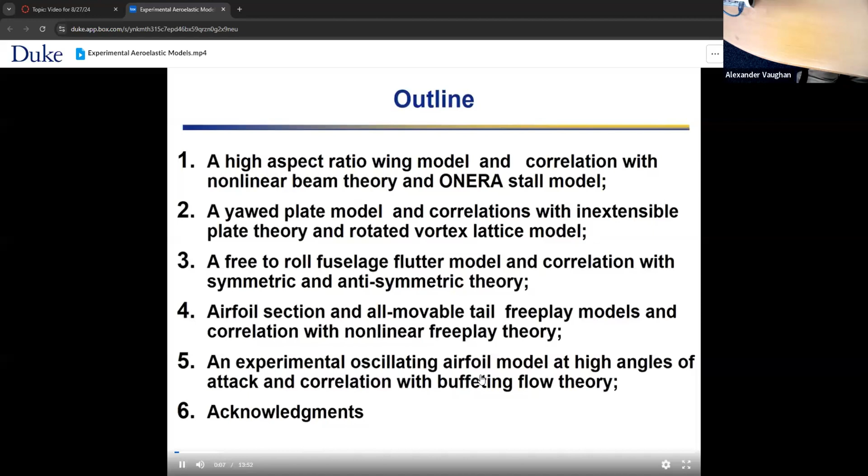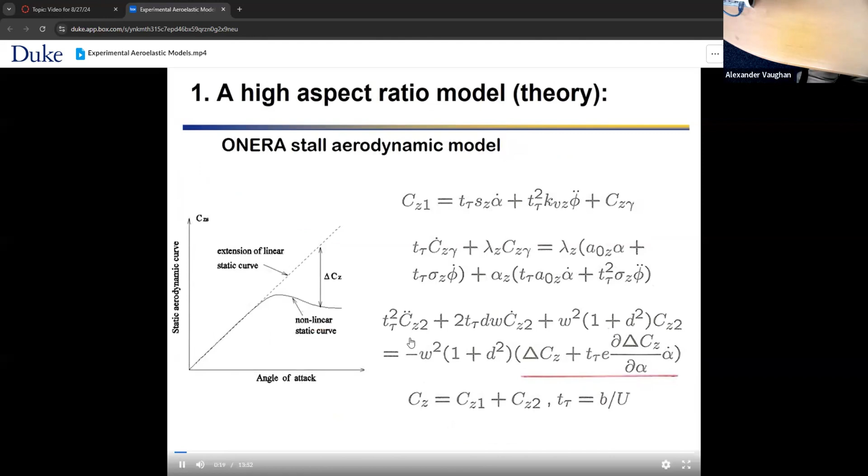But this will give us a shot at what's happening initially. So if I click this, I'll get started. It'll start playing from the beginning. Is that where you want to start? Okay, that's fine. It only runs 13 minutes, so we'll let it run through. And this is just a list of the various wind tunnel experiments for which we have videos. And there's the math models. I'm not going to tell you the details of the math models, but there are some math models that go along with this.

This is not the video yet, but this gives you an idea of what the physical model looks like in a wind tunnel. Over here, this is the model in the wind tunnel that's mounted on the sidewall. It's a very flexible piece of structure, so it's deflecting under gravity. The next time you're at an airport and you look at a Boeing or Airbus airplane on the runway before they start flying, they're deflecting under gravity. They're very flexible. Even modern commercial aircraft are much more flexible than they once were, and deliberately so.

So when you fly, the aerodynamic forces lift the wing, counteracting gravity. The lift has to equal the weight of the airplane, otherwise you don't get off the ground. But you'll see in the video that wing lifting as we start the wind tunnel and the airspeed increases. And what you'll see is that when the wing becomes approximately horizontal, when the steady flow lift is balancing the weight of the wing, that's near where it begins to become dynamically unstable. And we call that flutter. And that's the bread and butter of aeroelasticity, right?

Because most airplanes are designed to be not very far away from the flutter condition. You usually don't want to be in the flutter condition. Sometimes you find yourself in that condition unexpectedly, particularly in a flight test. Although it has happened in operations, there are cases where the airplane was initially free of flutter, but they made a modification and they either didn't do the analysis or the wind tunnel testing appropriately, and the chief engineer decided not to do a flight test because it was going to be very expensive and delay the program. And then when they flew the plane, they discovered that was probably not a good cost-saving measure.

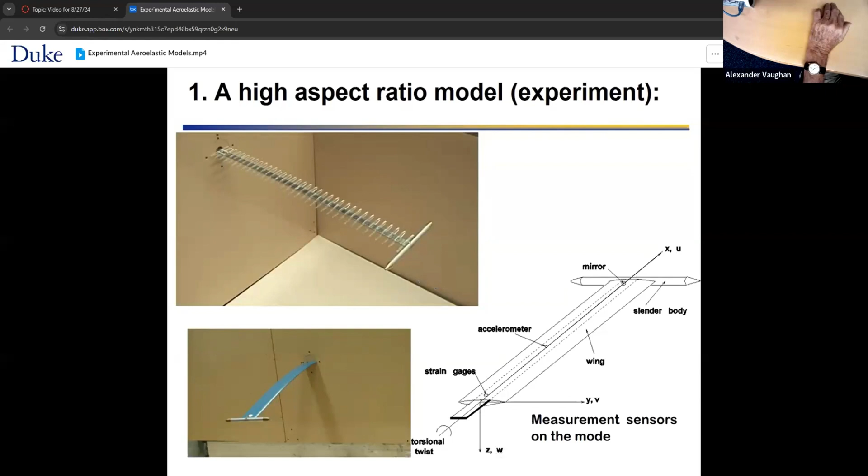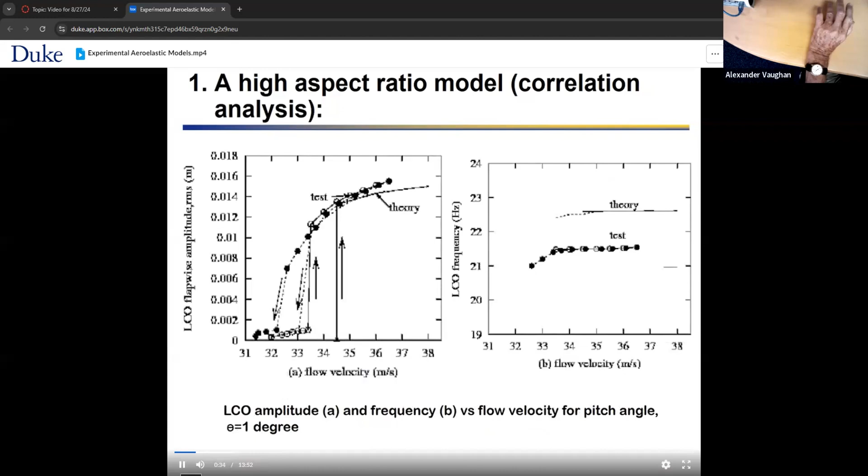This is just some data and some comparison with computations. I'm not going to talk about that today. Maybe at the end of the course, I'll come back. Okay, so here are the two. Apparently, we have some sound. Our wind tunnel is noisy, right?

On the left is we're going to start at a very low speed, essentially zero, and go up to 33.5 meters per second. Typically, we test in the range 30 to 50 meters per second, which is sort of a sweet spot in our wind tunnel. And this is a fairly typical low-speed wind tunnel. This wind tunnel normally will go up to 80 meters per second, but we've never been brave enough to run it that fast because the wind tunnel shakes, the quality of the flow goes down, all kinds of reasons not to test in that range.

So our joke about our models is we discovered a universal number. All flutter models flutter at 30 meters per second because we've designed them that way. We've chosen the dimensions of the model and the materials, so everything interesting will happen in a flow range that we like. Okay. And then on the right-hand side, we're starting at a high speed and then going down.

And you'll see this is one configuration. Here we're looking more end on. And because we've stopped the video, if you look at this, it's really oscillating about a point. It's moving in a pitch-like or torsional-like mode about a point, right? And you have a little blur at the ends because here the motion is very small, but at the ends it's twisting. This also bends. It bends and twists. And so classical flutter that most people know about, if they don't know anything about any of the other kinds of flutter, is something called bending torsion flutter. And this is a bending torsion kind of flutter. But, well, enough said, let's go.

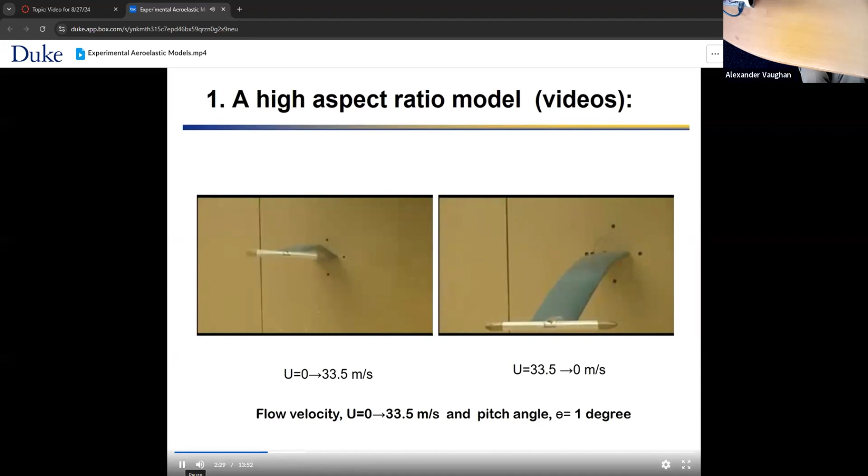Now we're going to see a computer simulation. So we build computer models that compare with those experiments. So these are computer generated models. It starts out as a system of nonlinear partial differential equations. It gets converted through a certain methodology into a larger system of ordinary differential equations in time. And we do a time simulation.

We start with some initial conditions, we let the computer run, and if it's below the flutter condition, it's an oscillation that damps out. If we're above the flutter condition, the oscillation initially grows and then reaches a limit cycle oscillation, some finite amplitude, and this goes back and forth. And we'll see how that works.

So this is just two different views of the computer simulation. It's quieter, right? Need to go back. I didn't realize it was quite that quick.

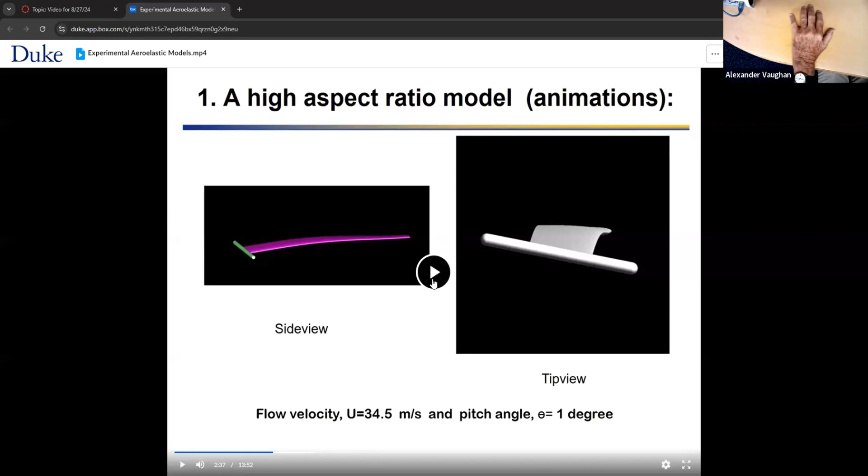Again, I won't go into the math associated with these systems. Oh, let me stop here though. So we're now looking at a different model, and this is a cartoon of it. What we're going to look at is a nice rectangular plate made out of aluminum, for example. This is going to be clamped along this edge and free on all these other edges. And then there's an angle beta, which describes how it's rotated relative to the stream. See, the flow stream is this way, right?

So if beta is 0, then this clamped edge is perpendicular to the flow stream, and sort of clamped at the leading edge. And then if we're trying to get money from NASA or the Air Force or somebody, we call that a control surface. Or if beta is 90 degrees, so it's clamped along the side edge, we tell them it's a wing or possibly a fin on a missile. Okay, because generically that's what it is, right? Except it's a pretty simple structure compared to what the company might build. And so we're interested in how the behavior changes as we change beta.

Also, there's an application where if beta is 0 and this is clamped at the leading edge, it turns out that the amplitude of the oscillation is larger than if beta is 90 degrees and it's clamped at the side edge. And so if you want it to vibrate a lot, you want to adjust beta accordingly. And then if we're trying to sell this to the National Science Foundation, which we have done, we tell them it's an energy harvester. That is, we have created a mechanical vibration. We put a piece of piezoelectric material on it, and that converts the mechanical vibrations into electrical signal and electrical energy. Now we're talking about milliwatts. We're not talking about your local power plant, right? But if you're out in some remote location on top of a mountain, in a jungle, in the ocean, a remote river stream, you can imagine putting something like this in the flow and generating enough to power your cell phone so you can call for help.

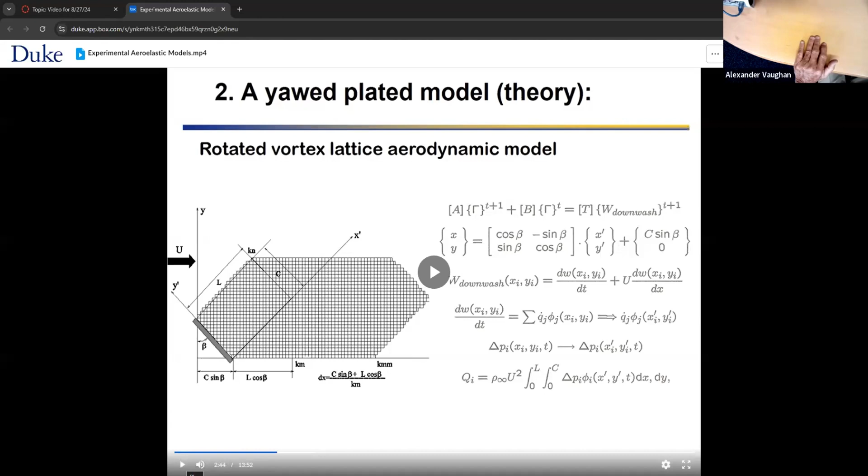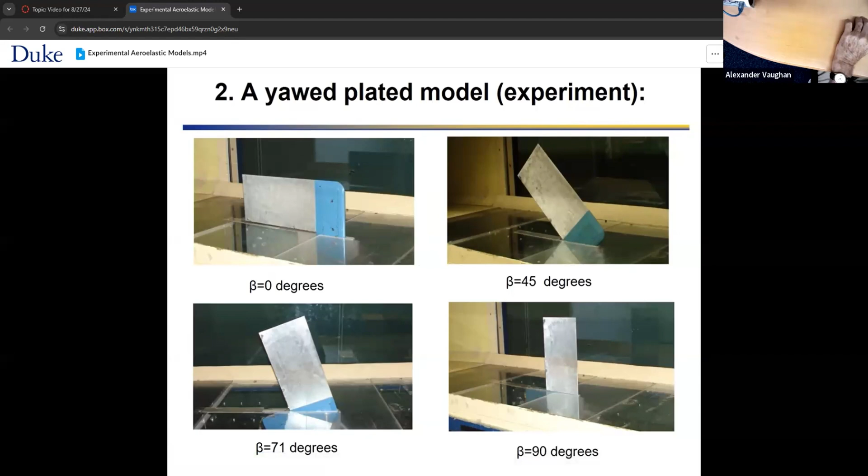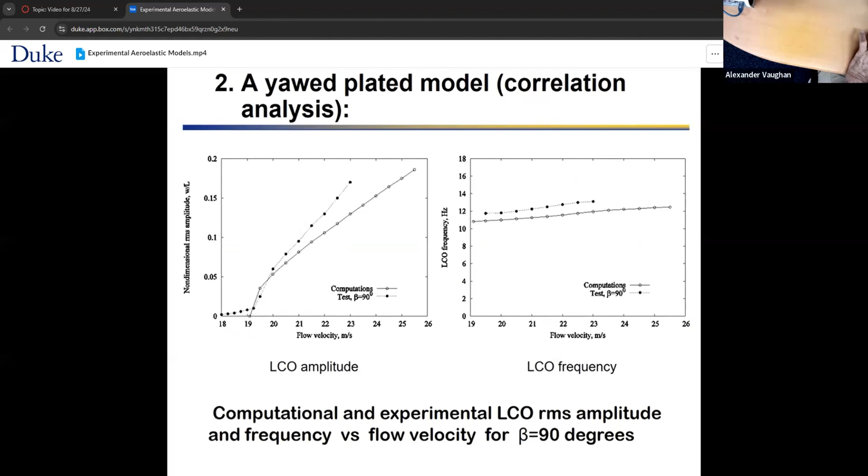This is again some detail which I won't bother you with today. But you do some static deflection tests and vibration tests that characterize the model. And this is some correlation between theory and experiment, which is not too bad. I think actually it's quite good. This is showing the amplitude versus flow velocity, and on the left and the frequency on the right. Okay, here's data at 0 degrees, and it's really moving, as you can see, right?

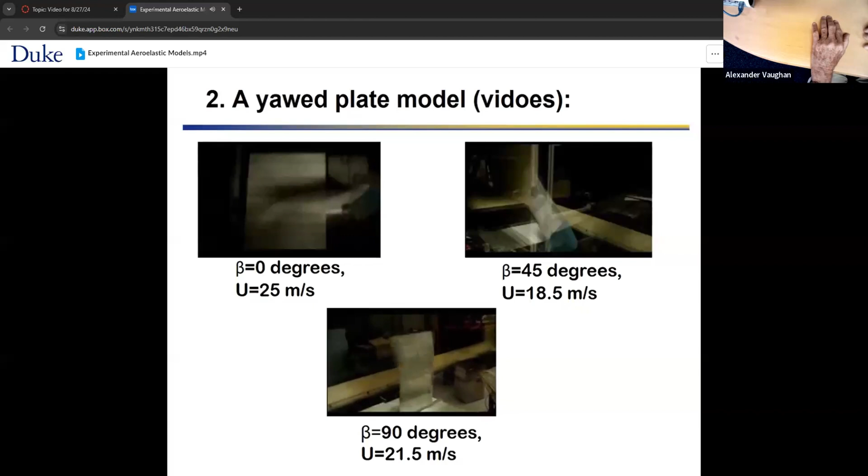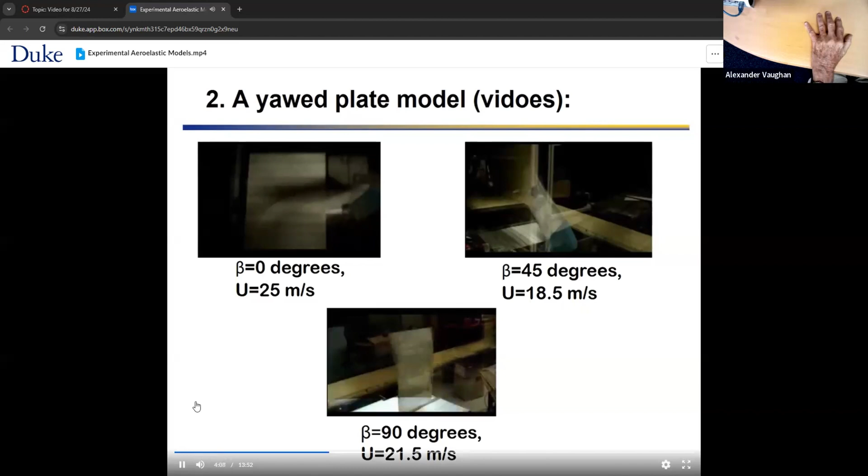So that's great from an energy harvesting point of view. It's not great if it's a control surface on your airplane. Here it is at 45 degrees. The motion is still pretty violent, but it's not as violent as at 0. Here it is at 90 degrees. It's still pretty healthy. You probably wouldn't want to fly in that airplane, but it's not as large motion as was the case for beta 0.

This is yet a different model. The F-16, which is still probably the most used fighter aircraft within the NATO countries and other friendly powers. Australia has some. And that's the airplane that Ukraine has been trying to get for a long, long time. We finally sent them some. It is an airplane that has a wing, has a fuselage. And this is our low budget effort to mimic the F-16 in our low speed wind tunnel. Generically, it's not meant to be even a scaled model of the F-16.

But there's something interesting about the F-16 and some other aircraft. If I have 2 wings, now we're no longer doing a half wing, we're doing a full wing, right? So this piece is our version of a fuselage. And there's a wing on this side, and there's another wing on that side, which you may have a hard time seeing in this picture, but you'll see it later on in a little more clarity. One of 2 things can happen. This is a symmetrical geometry in the sense that both wings are identical as best we can make them, right? But when this goes into flutter, it could do this. It can also do this. Even though it's a symmetrical geometry, anti-symmetrical motion is perfectly possible and may be more critical.

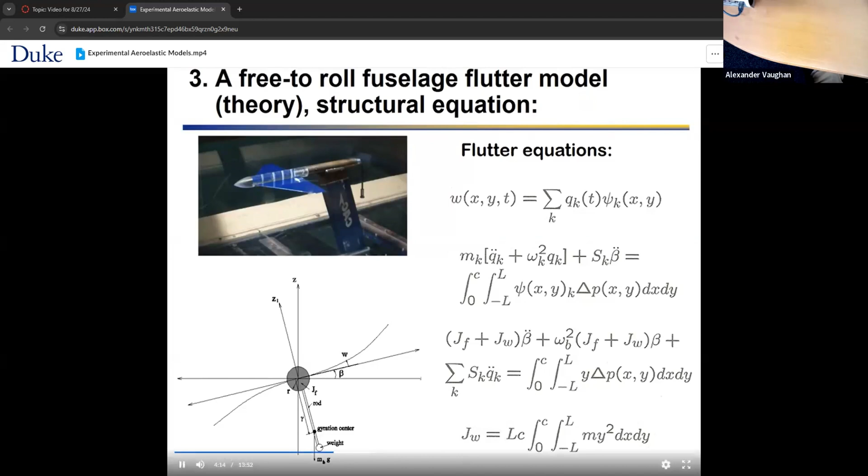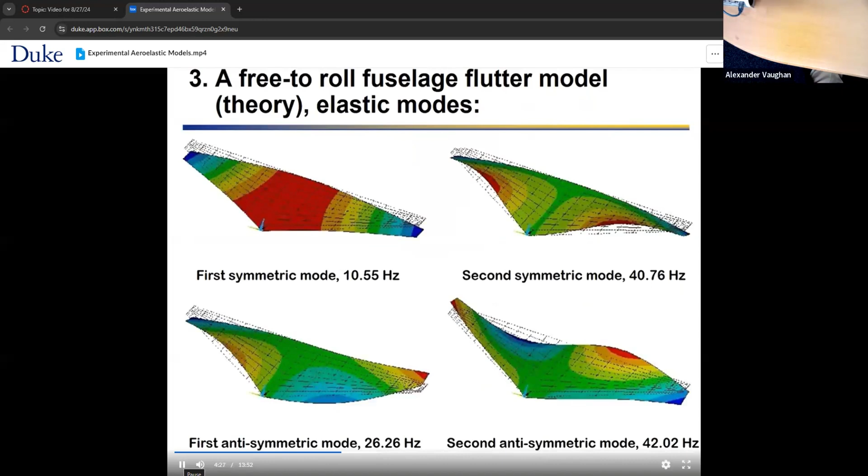Okay, let's go on here. Just some more detail on the configuration and some mathematics. We measured the natural frequencies of the model and correlated that with calculations. Here you see it a little more clearly.

Here you see it's two identical wings. This is the fuselage. This fuselage is free to rotate as a rigid body. It's free to roll. It can't move up and down, and it can't yaw, but it can roll. So in the mathematical model, we will allow for this rigid body roll of the fuselage as well as the flexibility of the wings.

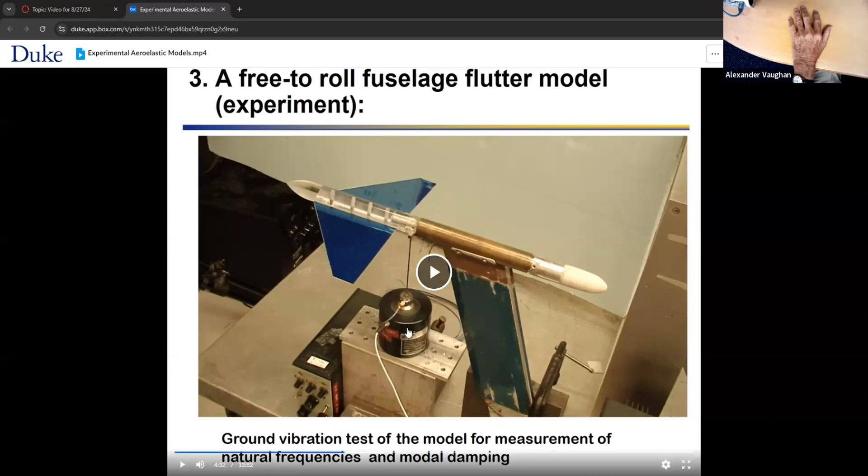And we can test it with that roll degree of freedom taken out by clamping it. Then it cannot move anti-symmetrically, it can only move symmetrically, or we can let it be free to roll, in which case anti-symmetric motion can occur. And one of the questions is which one's more critical? You'll see the answer to that in a moment. This is just a vibration test device where we're shaking them to see what the natural frequencies look like. And this is just some test data. I won't talk about that today.

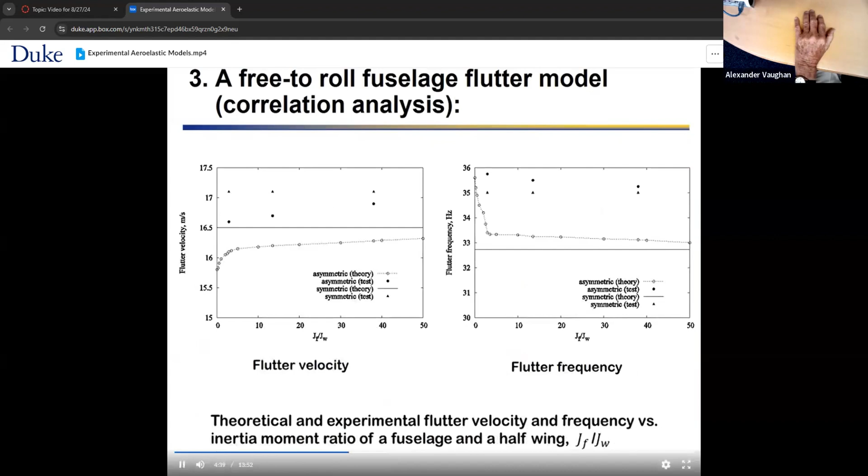Okay, so now we're going to see the model in the wind tunnel. We have a certain flow velocity, and we remove the roll degree of freedom, so we only have symmetric flutter. It occurred at 17.2 meters per second, but the antisymmetric flutter actually occurred slightly lower. That difference depends a little bit on what you're trying to do. It's not a huge difference, but if you're trying to convince the government to let you fly the airplane, and they say you must assure us within 15% that you know where the flutter speed really is, that might be important, because you might have to make some significant change to your model that would cost you performance or weight or something that you wouldn't like to do. Anyway, we'll see what happens here.

So here it is. And notice that the motion isn't purely sinusoidal. The linear models always say the motion is going to be sinusoidal in time, but real models with nonlinearities may be a little more complicated in terms of frequency content. I think the one on the right will flutter in a moment, I hope. It did the last time. Yes, good. Nice thing about videos, as opposed to live demonstrations, is that the videos usually work. Live demonstrations are hard to do.

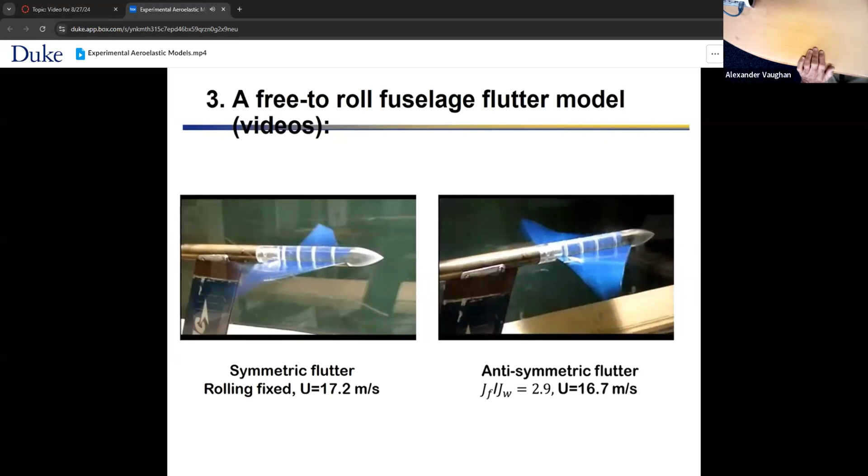Okay, now we're going to a different model. Let me explain this cartoon. We're looking at a side view. This is an airfoil, and now we have a control surface on the back, a real control surface. It rotates, it pivots about a certain axis. We're going to study this model fairly early in the course.

We think of the airfoil itself as having a spring which restrains motion up and down. That's called plunge, that's the jargon. It also has a torsional spring which restrains it against rotation. We call that pitch. And then rotation about this point is usually called flap. These are just words, we could call it oranges, apples, and pears, but we prefer plunge, pitch, and flap rotation.

So it has 3 degrees of freedom, right? There are 3 possible motions, and we can write down 3 equations that describe those motions, and they're coupled in general. They may be coupled inertially, they may be coupled through the springs, and they're certainly going to be coupled through the air. So we have to think about how these motions couple and may produce a form of flutter.

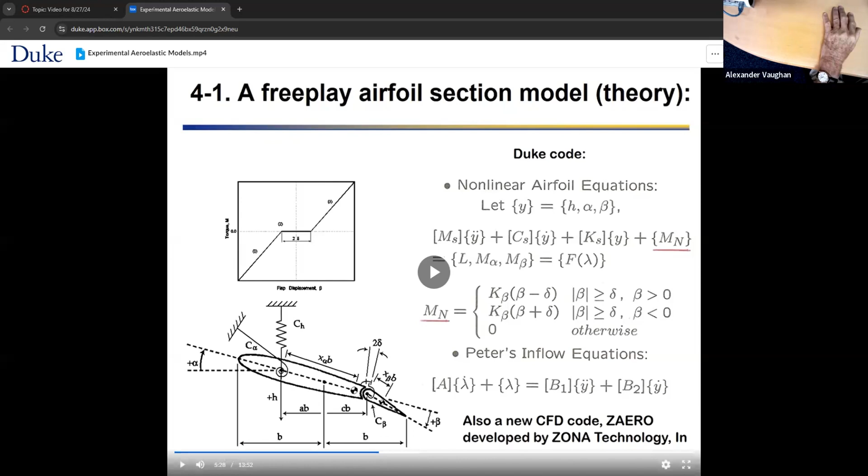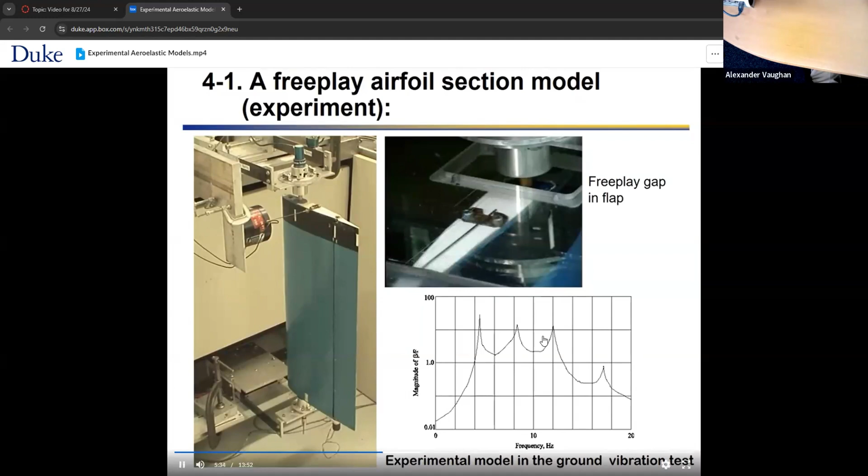Here, we correlated calculations, and this is amplitude of motion and various degrees of freedom. Again, we'll talk more about that later once we've done a certain amount of discussion of the mathematical model. But what you want to do is correlate the motion and the frequency of the motion between theory and experiment. So remember, the motion is plunge, pitch, and then control surface rotation. We're going to measure all those motions. They're all vibrating at the same frequency, but they have different amplitudes and they change with flow velocity and all that.

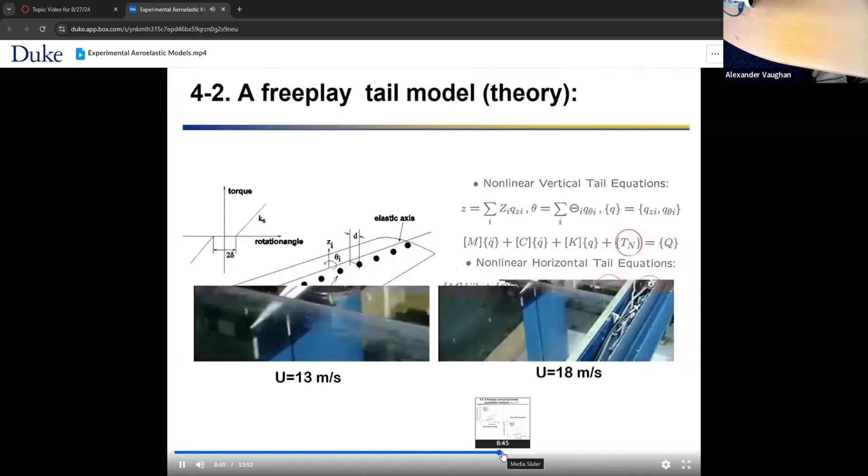Okay, all right, now we're going to, this is again free play, but it's a more interesting model for both technical and historical reasons. Now we're actually going to have a wing. See, that previous model was an airfoil that spanned from, say, bottom to top of the wind tunnel, and basically was, if you will, a two-dimensional flow. There was nothing happening in terms of span-wise variation. It was uniform in span-wise variation because we tested it and built it that way.

Here we actually have a three-dimensional flow over something that looks sort of like a wing, but it was meant to model what is called an all-movable control surface, horizontal or vertical, usually horizontal. So now it's going to be pivoting and bending about this axis, and the free play is in that root connection in the pitch degree of freedom. But now this model also bends or twists all along its span, right? So it's a more complex model.

This happens to be the model that the Air Force tested some years ago. Not the exact model, but it's more or less a modern reincarnation of it, which led to the design criteria which I talked about. At that time, very little was known about nonlinear dynamics. This is decades ago, and so they interpreted their data incorrectly. I won't go into all the detail, but that led to the design criteria we currently have, which is still persisting. So this was an effort to redo the test, interpret it with a modern understanding of nonlinear dynamics, and convince the government that they should change their design criteria.

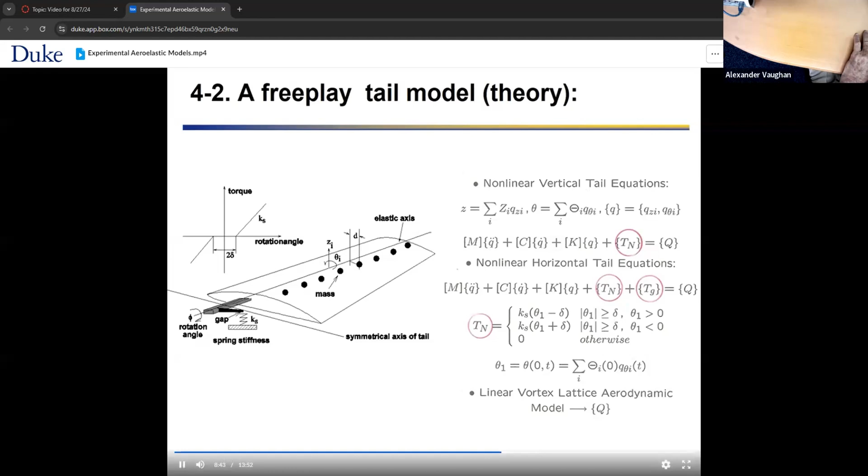This is some detail. I won't tell you about that. Again, we took some data. I won't tell you about that, not today at least. Okay, so now we're cantilevering this wing or all-movable control surface from the ceiling, right? This is the ceiling of our wind tunnel, and again, initially to avoid the effects of gravity, but later on we tested it horizontally as well, which makes it more interesting but also more complicated.

So let's look at this. We're looking down more or less on the top, sort of at an angle. And this is a grid that allows us to see roughly how large the motion is. And then the side view should start oscillating here in the middle, if all goes well. There you go. These are not huge motions, but they're enough to be structurally significant and also significant to the pilot if they're trying to control the airplane. Okay, let's keep going here.

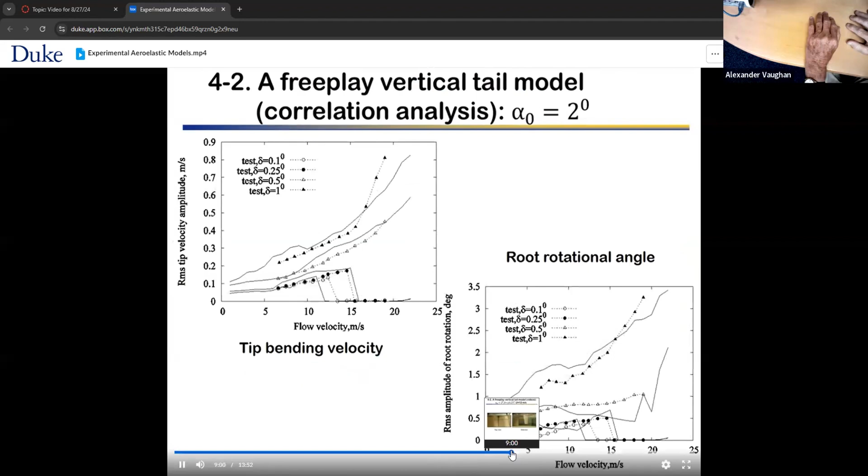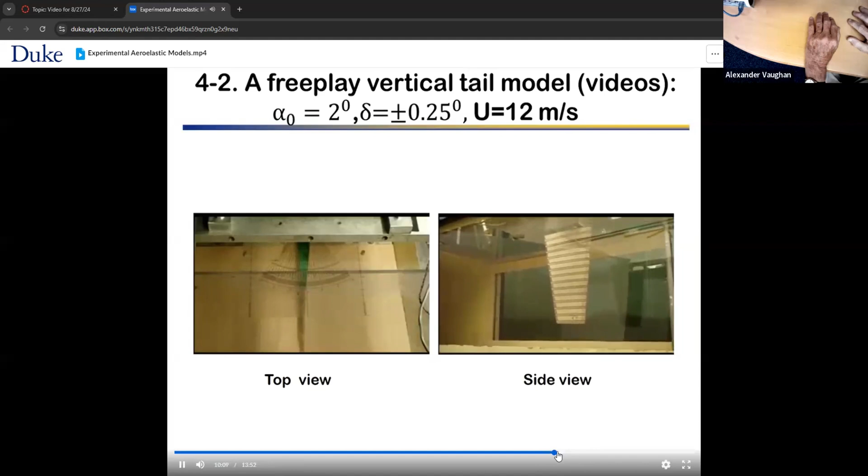What did I do wrong? Check the ending. Go ahead. It's buffering. Reloading. Keep going. It's just the next slide after those videos. Okay. No, I was trying to zip by, yeah, that's fine. I think it'll get into where I want. Okay.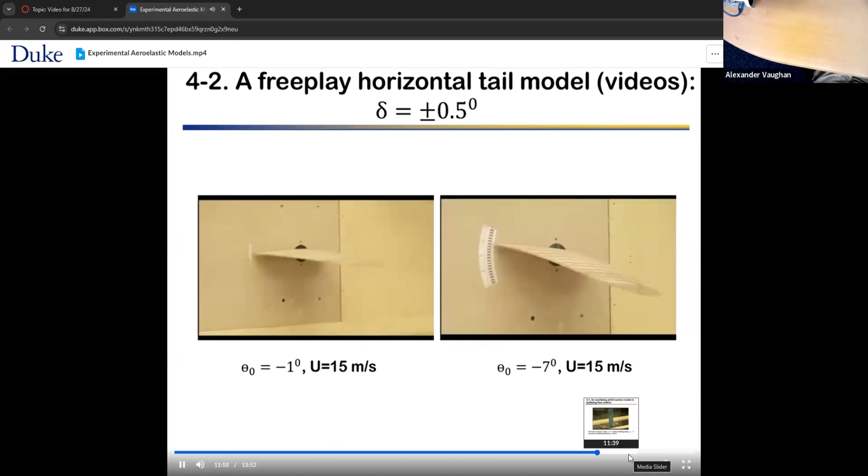We've got one more model. I'll show you. See this. There she's up. Okay. This is actually a buffeting area. Okay, so let's stop here for just a moment.

Aeroelasticity formally deals with the dynamical interaction between a flexible elastic structure and the aerodynamic forces, hence aeroelasticity. The flow itself can be unstable, even if the structure does not move. Okay. The classic case is a laminar flow becoming turbulent. That's a dynamic instability of the laminar flow leading to a fluid-only oscillation. But even if the flow is turbulent, under certain conditions,

turbulence, which tends to be small in scale in space and amplitude, can become much larger in scale in space. The boundary layer thickness is small compared to, say, the chord of the airfoil. But there can be buffet, which is an oscillation where the appropriate scale is actually the chord of the airfoil. The oscillation can be rather large. The lift coefficient, if you know what a lift coefficient is, can be a significant fraction of 1, which is a huge oscillating lift coefficient. And an airplane that's suffering buffet is in bad trouble, and the pilot is in bad trouble. And it's a phenomenon which is still not well understood. If you ask a typical aerospace engineer who works in dynamics what the biggest thing is that they don't really understand very well, more often than not they'll say buffet. Yes.

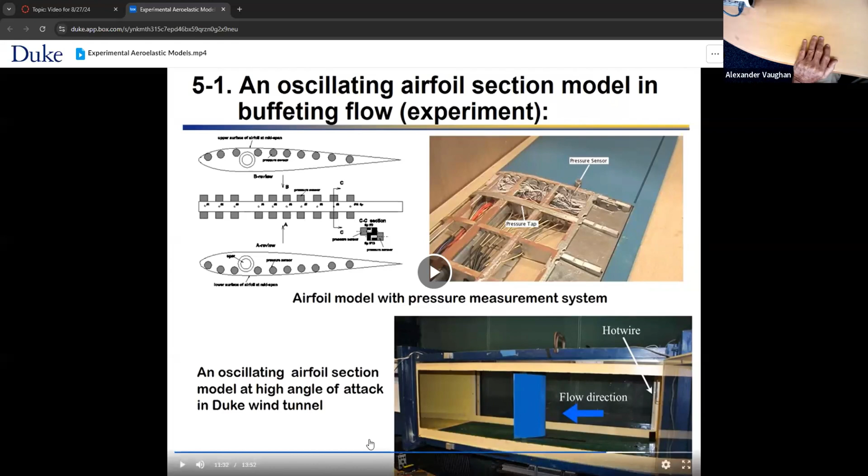Initially we're not going to see the airfoil moving because it's not intended to move. But then, just so you can see something, you can take a little piece of the trailing edge of the airfoil and make it a flap or a control surface. You can put free play in it, and then you can see that move. But now it's not really fluttering. It's really the oscillation of the flow, because I'm at a high angle of attack and the flow is unstable, and that oscillating force is driving that flap with a free play spring. So that's what you're going to see. Okay, so let's go ahead and do that.

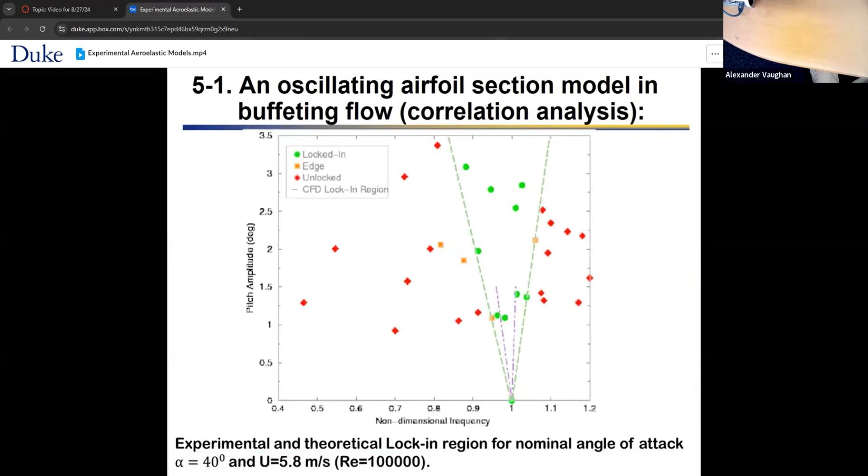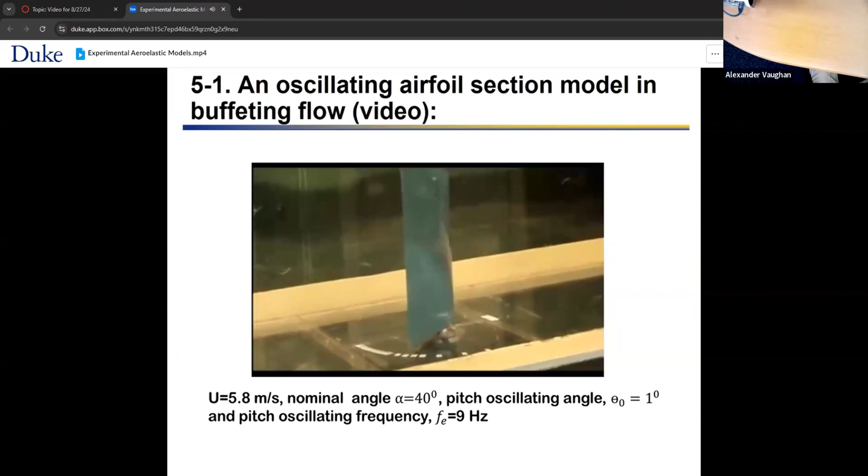We can also, however, having said that, oscillate this model, but we oscillate it through a prescribed angle. We control the amplitude, the angle, and the frequency. There's another phenomenon known as lock-in, where if you prescribe an angle of motion near the characteristic buffet frequency of the naturally oscillating flow, you can move the frequency of the oscillating flow to be equal to your prescribed frequency.

Then the other thing that can happen is if the natural buffet frequency, this is the frequency of the flow, even when the airfoil is not moving, happens to be close to the natural frequency of the now elastic structure, those two frequencies are close to each other, and you get a significant fluid structure interaction. In some sense, that really is aeroelasticity. And you want to avoid that.

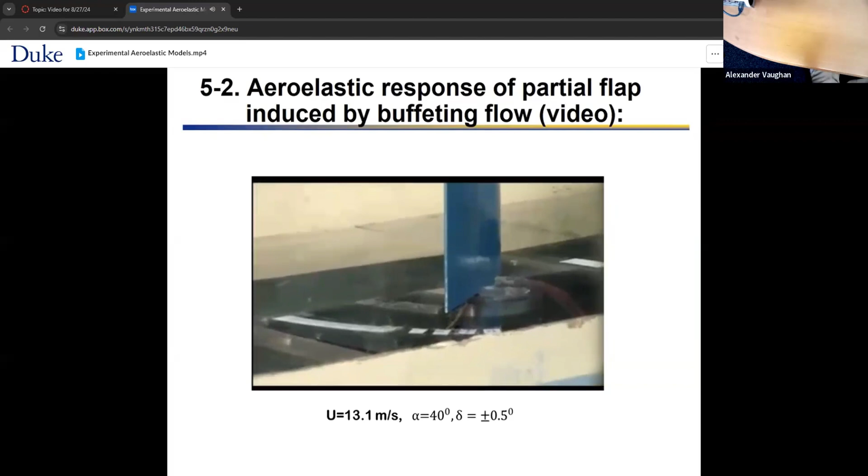And that occurs in airplanes, it occurs in smokestacks, it occurs in submarine periscopes, any large object that looks like a bluff body where the flow goes past it and the object is flexible enough, even a smokestack in a high wind. A tall building presents a bluff cross section, and they have this fundamental thing. So civil engineers study this sort of thing. Okay. I think that's really it.

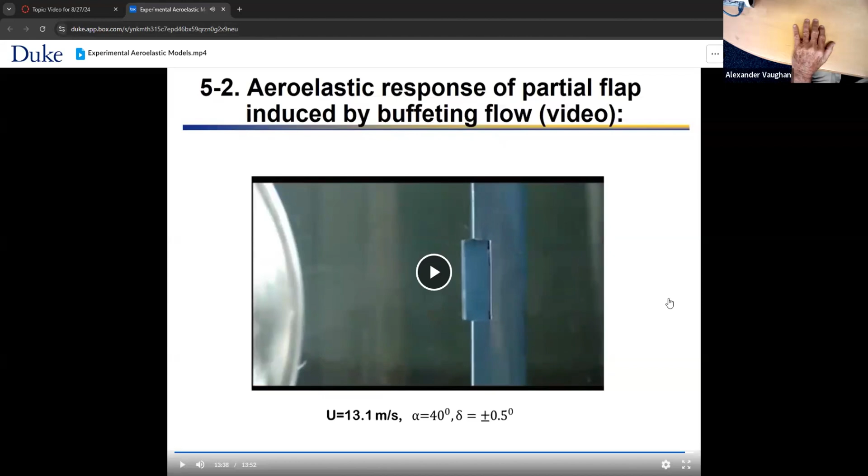Stop the video. Okay. So. Any further questions? About any of that? No, you're happy? Okay, so I thought that would be good to get you in the spirit of things, as it were.

So flutter's a real thing. When we go through the course, we'll be building some mathematical logic and saying, well, what does that have to do with the real thing? Well, it has to do with being able to predict or correlate with that kind of experimental data. If you're a person in the industry, you're trying to make sure your computational model is adequate to prevent anything bad happening. Or if it does happen, in some cases, there are some cases, F-16 is another example, where flutter occurs even though you didn't want it to.

But if the amplitude, because you're going to a limit cycle due to a nonlinearity, is small enough, you are faced with, do I fix it and prevent it altogether, or do I live with it? It depends on how big the oscillation is, and also on the type of vehicle. There are some launch vehicles that have flutter problems and they choose to live with it, particularly if they don't plan to bring the launch vehicle back. If you fire a missile and you're not thinking it's going to come back, then you might choose to live with flutter, provided it didn't compromise the performance of the missile. The Saturn launch vehicle, a moonshot vehicle, had a flutter problem, but it was small enough in amplitude that they decided to live with it rather than spend the time, effort, and money to prevent it.